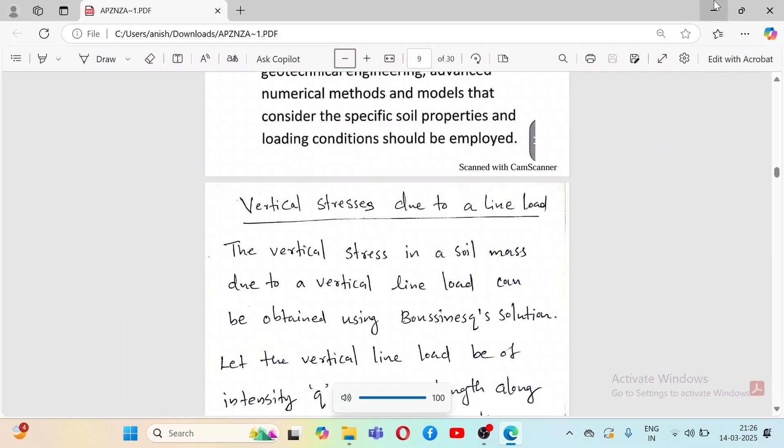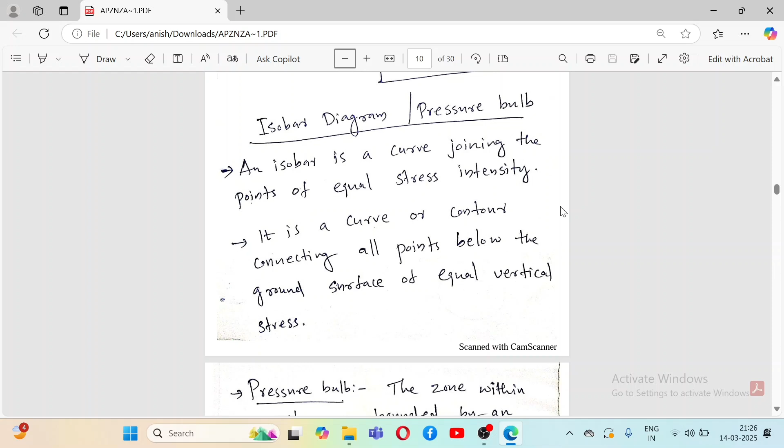Okay, an isobar is a curve joining the points of equal stress intensity. Okay, it is a curve or contour connecting all points below the ground surface of equal vertical stresses.

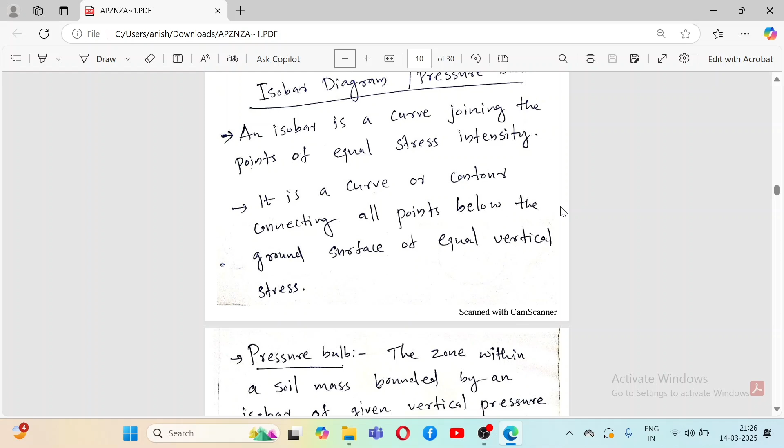Okay, whereas pressure bulb എന്ന് പറയുമ്പോൾ the zone within a soil mass bounded by an isobar of a given vertical pressure intensity is called pressure bulb.

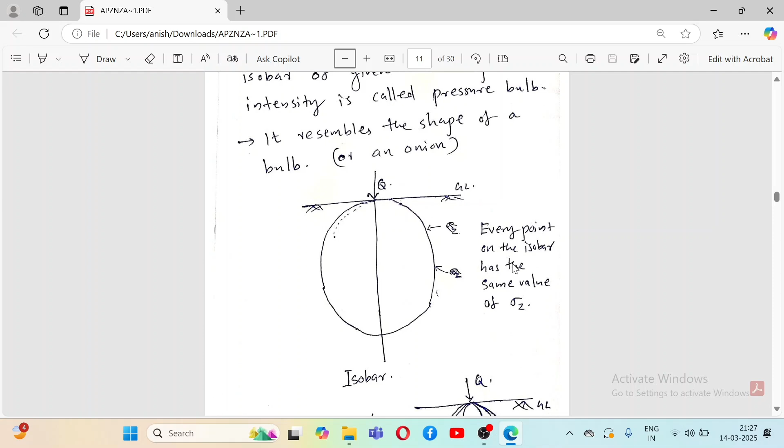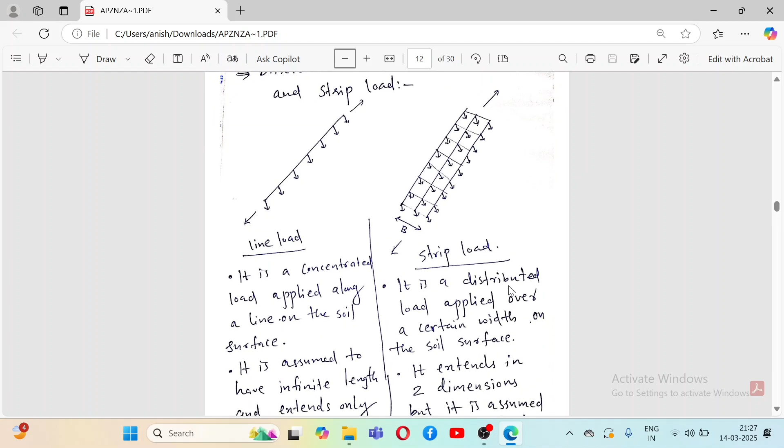Okay, line load is a concentrated load applied along a line on the soil surface. It is assumed to have infinite length and extends only in one dimension. Whereas strip load is a distributed load applied over a certain width on the soil surface. It extends in two dimensions, but it is assumed to be infinitely long in one direction.

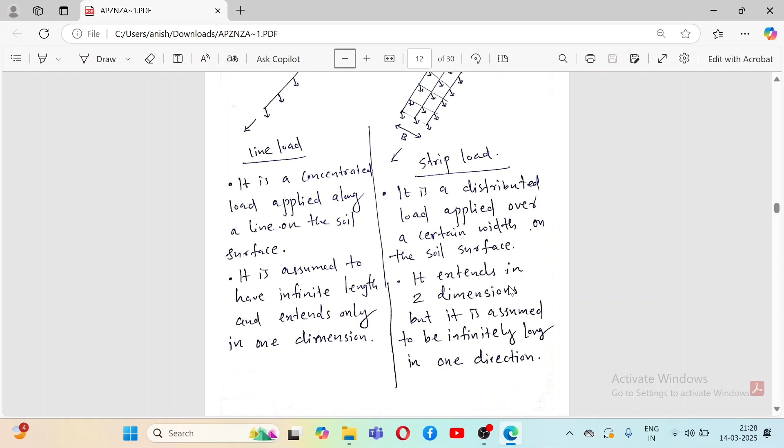Next, vertical stress under a strip load.

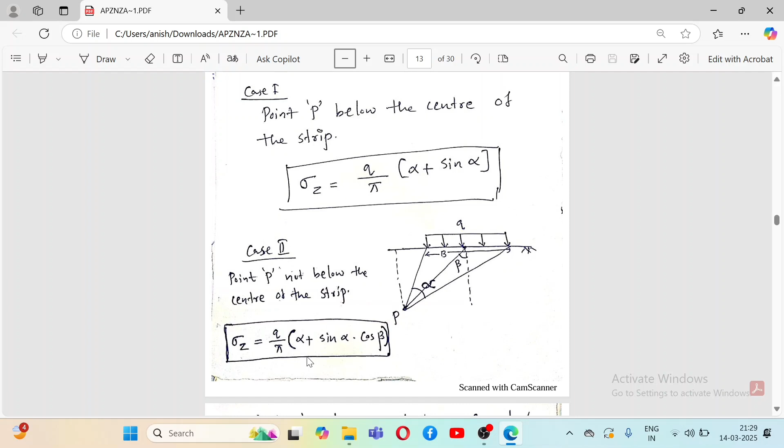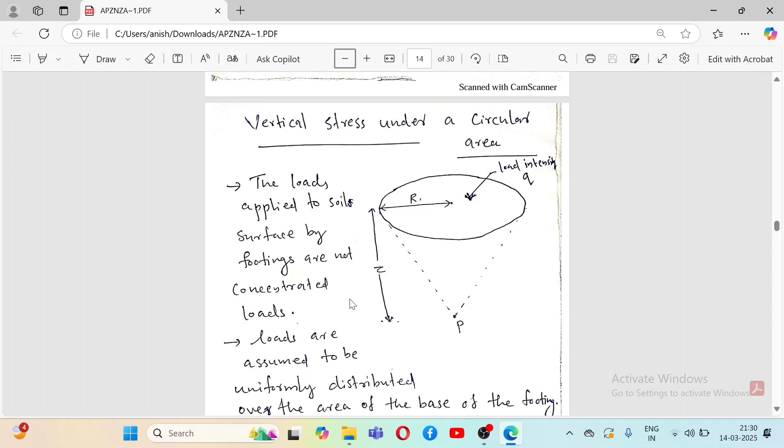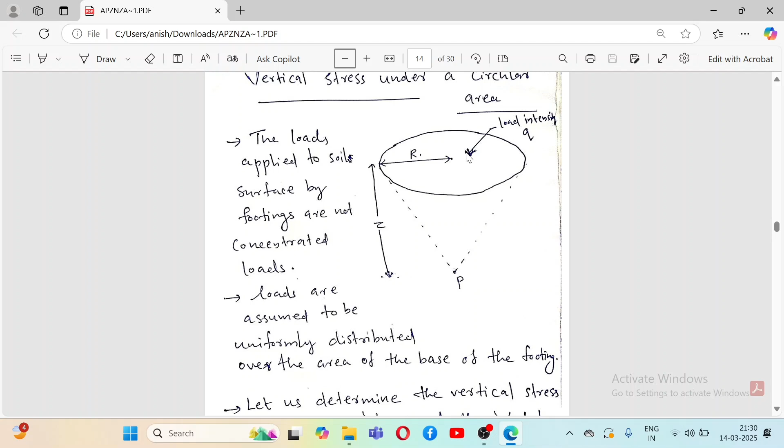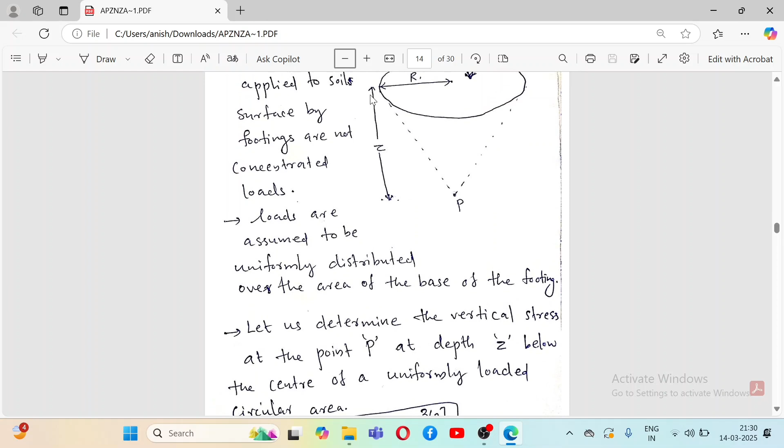Next one, vertical stress under a circular area. The load applied to a soil surface by footing is not a concentrated load. Loads are assumed to be uniformly distributed over the area of the base of the footing. So we are taking a load intensity of Q over here, and we are trying to determine the vertical stress at a point P at a depth Z below the center of the uniformly loaded circular area.

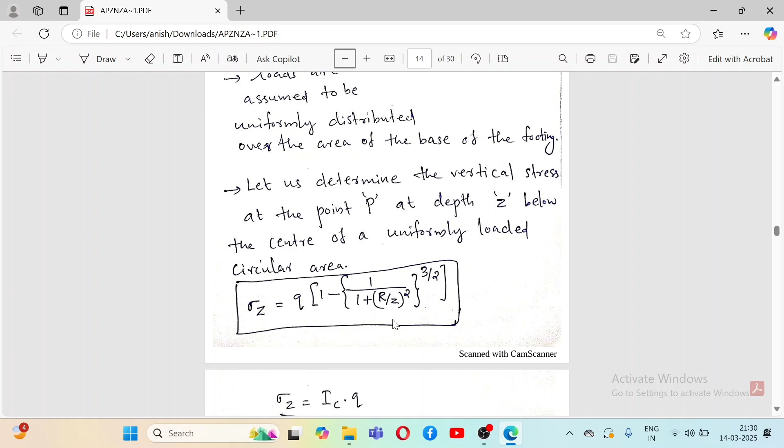So we get the equation as sigma z is equal to q multiplied by 1 minus 1 by (1 plus (r by z) whole square) whole to the power 3 by 2. So this is the equation you get for the circular area. Sigma z is equal to Ic into q, where Ic is taken as 1 minus 1 by (1 plus (r by z) whole square) whole to the power 3 by 2. Ic is the influence coefficient for the circular area and q is the load intensity.

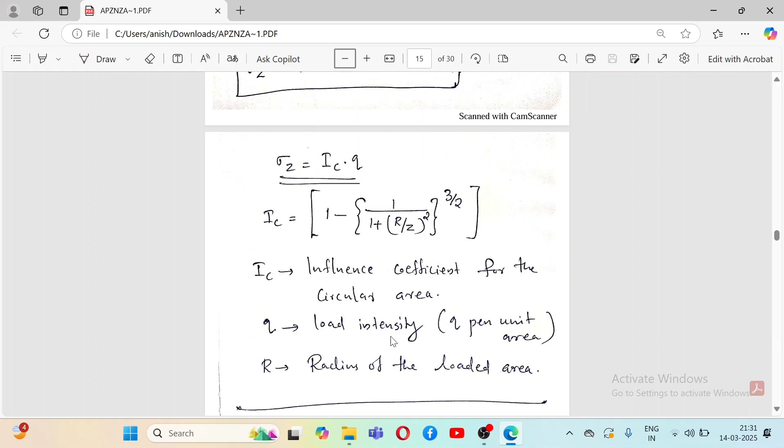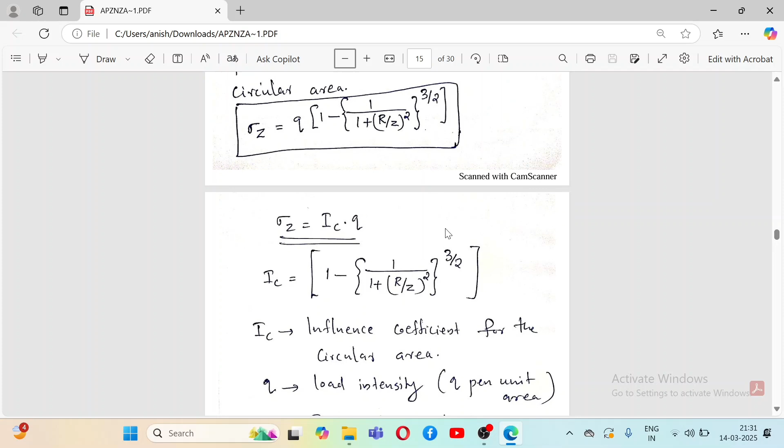R will be the radius of the loaded area. This is the loaded area, so we take R as radius of the loaded area. Try to remember these equations, which are very important. Then next comes vertical stress under a rectangular area. So first condition is vertical stress under a corner of a rectangular area.

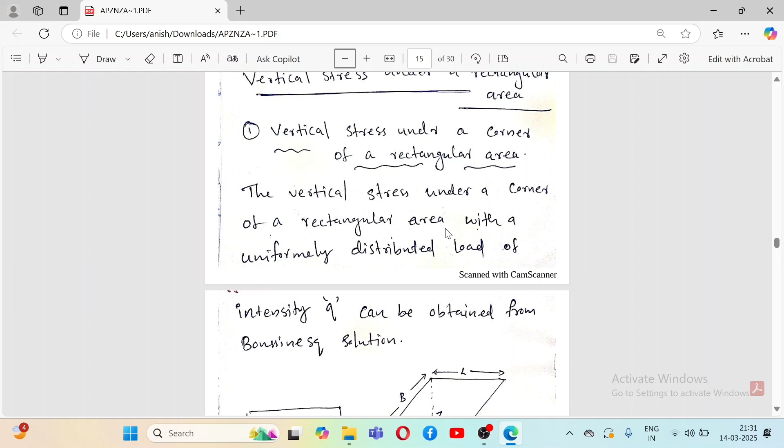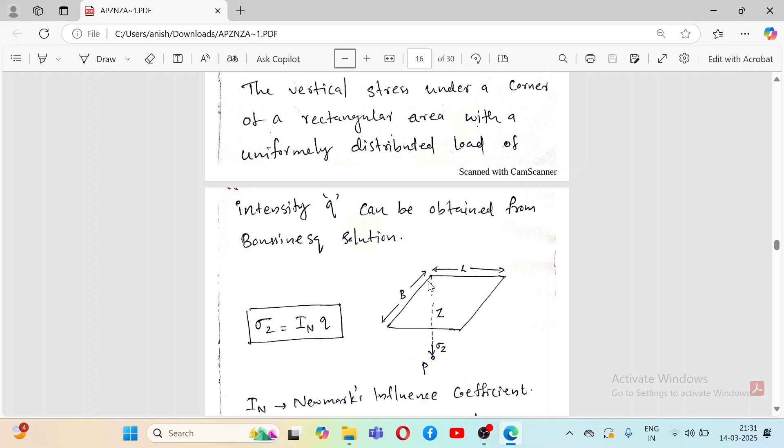If you are taking the corner of a rectangular area, the vertical stress under a corner of a rectangular area with a uniformly distributed load of intensity Q is here. It can be obtained from Boussinesq's equation as

In is equal to 1 by 2 pi, whole multiplied by mn divided by square root of m square plus n square plus 1, multiplied by m square plus n square plus 2 divided by m square plus n square plus m square n square plus 1, plus sine inverse of mn divided by square root of m square plus n square plus m square n square plus 1.

You need not remember this equation for the examination, problem purpose, but you have to remember it if it is asked for the theory questions, most probably. So we take this rectangular area. This is the length, this is the breadth. Here we take Z, the distance from loading to here.

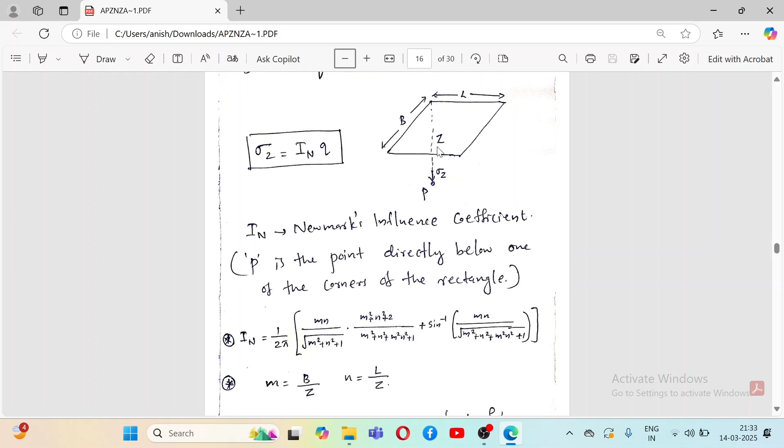So if you are taking a point P, you have to find the vertical stress at point P at a distance of Z. So M is equal to B divided by Z, and N is equal to L divided by Z. You get a value of M and N; certain values will be found. So according to this table, influence coefficient In for rectangular area, you refer whatever the value you get.

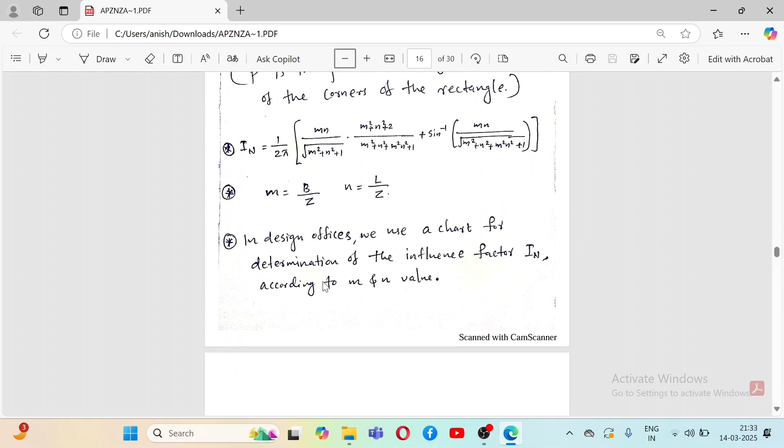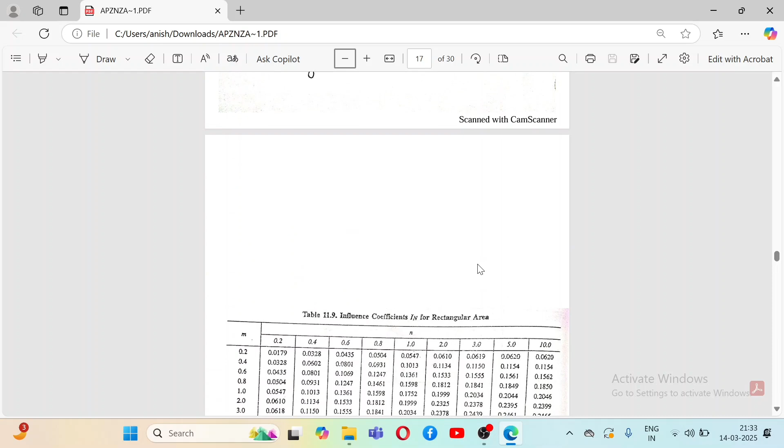For example, you got your value M as 2 and you got a value N as 3. So corresponding M value you got 2, here. Then N value you have here. M you got 2, N you got 3. Where is 3? So your value will be 0.2378. So while solving the problem, you have to refer this reference table. I think it will be much more clear when you solve the problem.

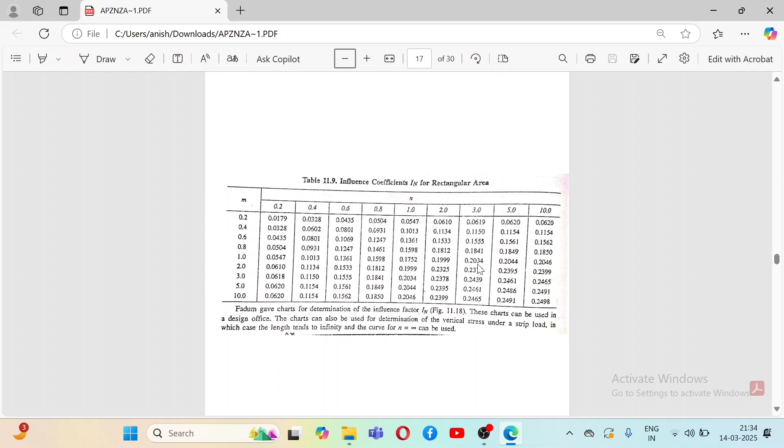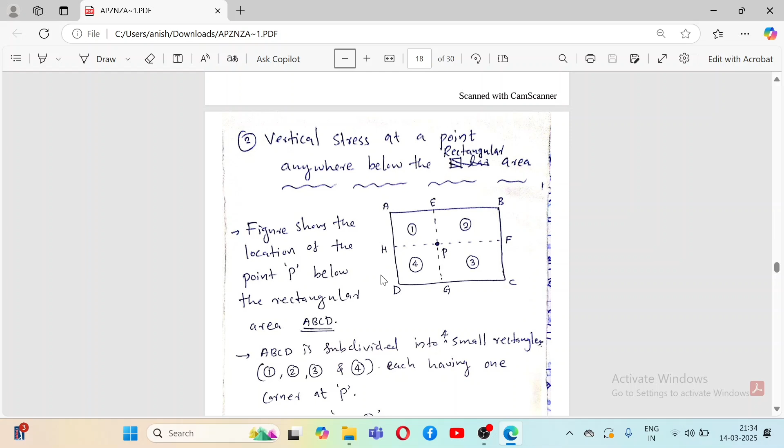Next, we have vertical stresses at a point anywhere below the rectangular area. Here it shows the rectangular area ABCD, with a point anywhere below it. Take point P here and separate this into smaller rectangles 1, 2, 3 and 4. ABCD is subdivided into 4 small rectangles, each having one corner at P. Equation 1 is sigma Z is equal to q into IN1 plus IN2 plus IN3 plus IN4, where IN1, IN2, IN3 and IN4 are Newmark's influence factors for the 4 rectangles marked 1, 2, 3 and 4.

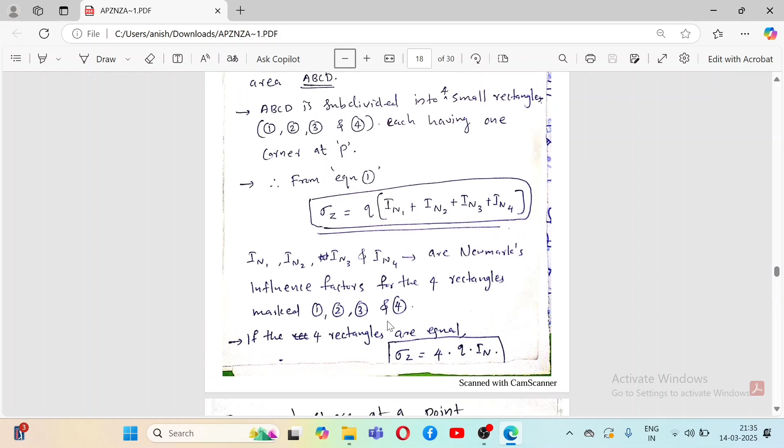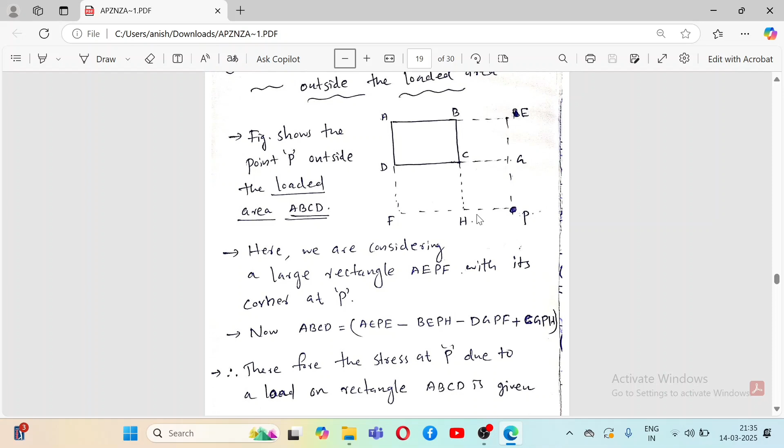So vertical stress at a point outside the loaded area. ABCD is the rectangle we have, and here we are considering a larger rectangle AEPF. So ABCD is equal to AEPF minus BEPH minus DGPF plus CGPH. You take a note and write all these equations, and you will understand how it is subtracted and added.

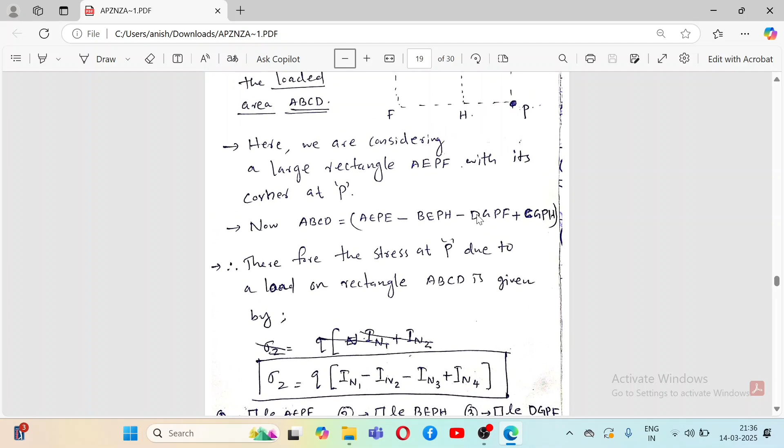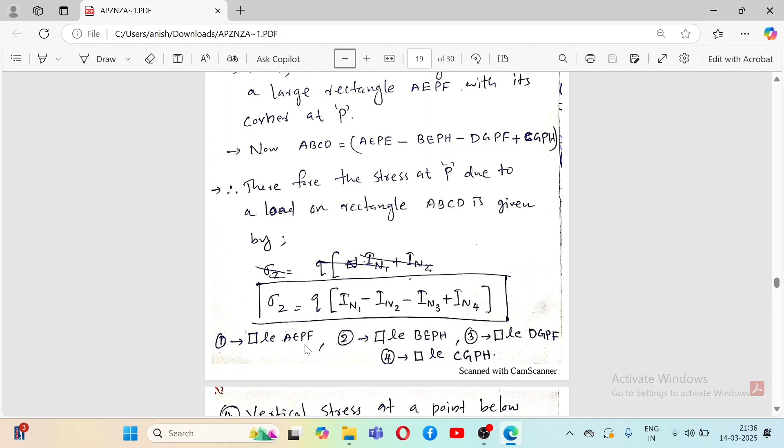And therefore, the stress at P due to a load on rectangle ABCD is given by q into IN1 minus IN2 minus IN3 plus IN4, where the corresponding rectangles are given as 1, 2, 3 and 4.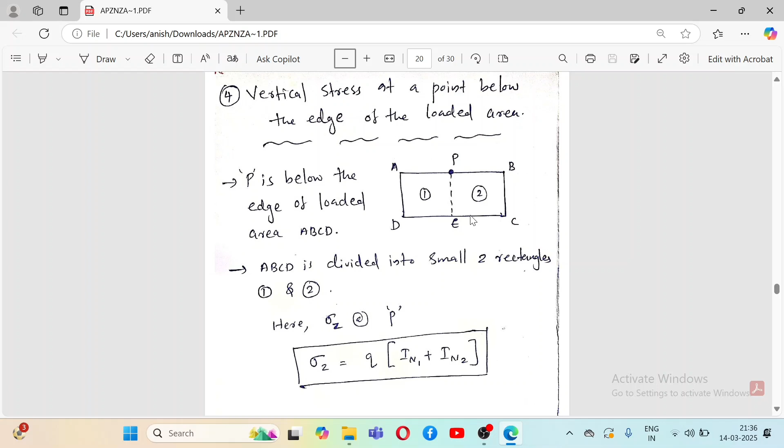Next, vertical stress at a point below the edge of the loaded area. P is below the edge of loaded area ABCD. We split it as 1 and 2; ABCD is divided into small rectangles, and sigma Z is equal to Q into IN1 plus IN2. When you solve problems, it will be much more clear to you.